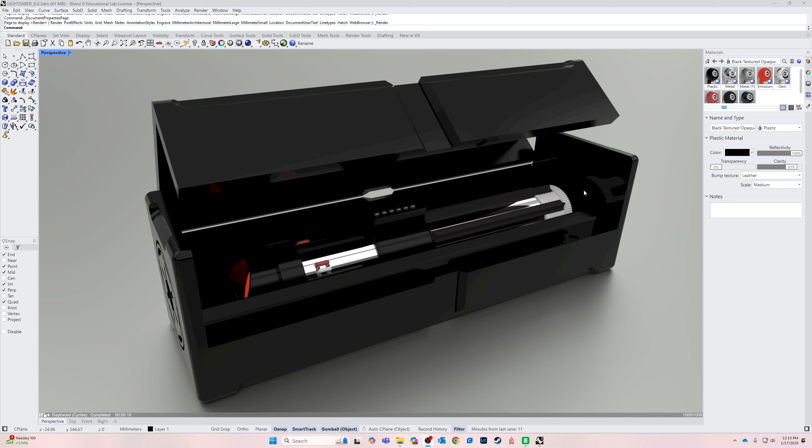To continue with our lightsaber project, the next thing I want to do is create a bit of packaging for it. I'm going to do kind of a premium packaging. I've got it here, and I'm going to attempt to replicate it. I already modeled it, of course. Let me switch into rendered view so I can move around a little bit. This is ray traced. I've got the Imperial logo on the back, and a nice crate-like object with foam inserts. I think it's going to be a really nice idea for a package. I can make it out of wood using the laser cutter, or I could 3D print it. Let's go ahead and get started.

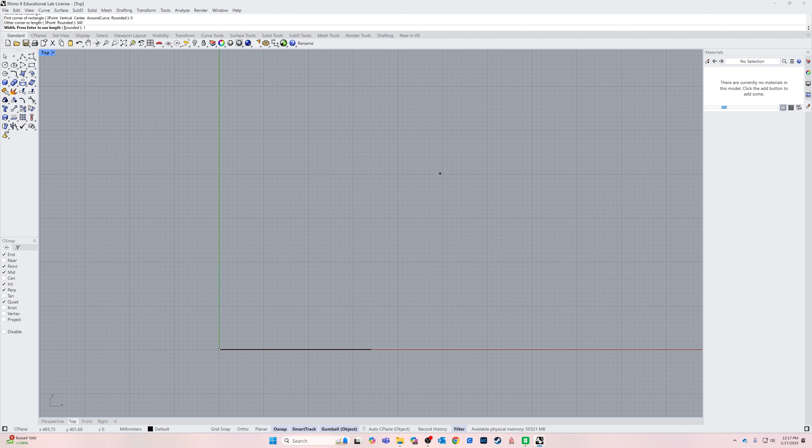I'm going to start with a blank drawing so I can always copy and paste it onto the other project later on. I'll start off in a top view, double click into that window. The overall dimensions of our little crate are 100 millimeters by 340 millimeters. I'll start with a rectangle at 0, enter, then come out 340, enter, 100, enter. So this is the overall dimensions.

I'm going to switch to a perspective view, grab it, and extrude that up 100 millimeters. So this is our box.

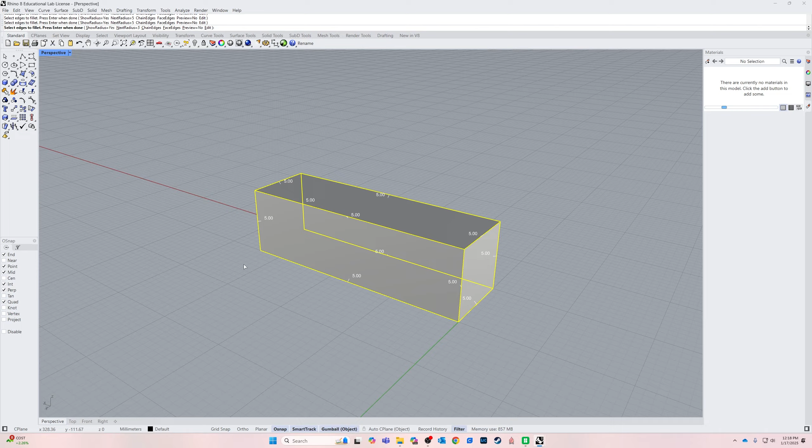Next, I'm going to round off all of the edges using fillet edge. I'll grab all of the edges with a radius of 5: enter, R, enter, 5, enter, then start selecting. If it doesn't say 5 here, escape out and make sure you enter your radius first before selecting any edges. Go through all of these and hit enter twice. Now we've got that shape.

What I want to do next is create these cutout sections. I'm going to go to a front view and draw a circle with a radius of 5. Actually, I'll use my grid snap here, so turn grid snap on. Let me start over with grid snap on, click here, and go straight up.

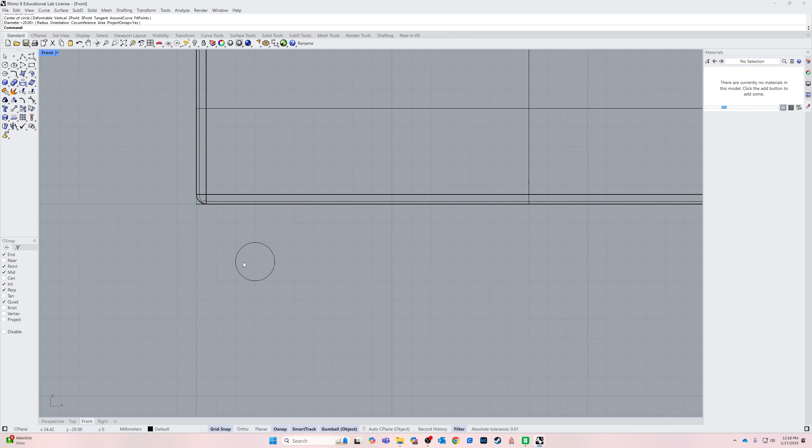I'm going to cut out this little section here, which is 10 millimeters. I'll draw a line from this quadrant to the center, and from that center to the quadrant, making sure snaps are turned on. Then trim, enter, select these objects as my cutting objects, enter, and trim that out, enter. Then I'll delete this and put it into its place here.

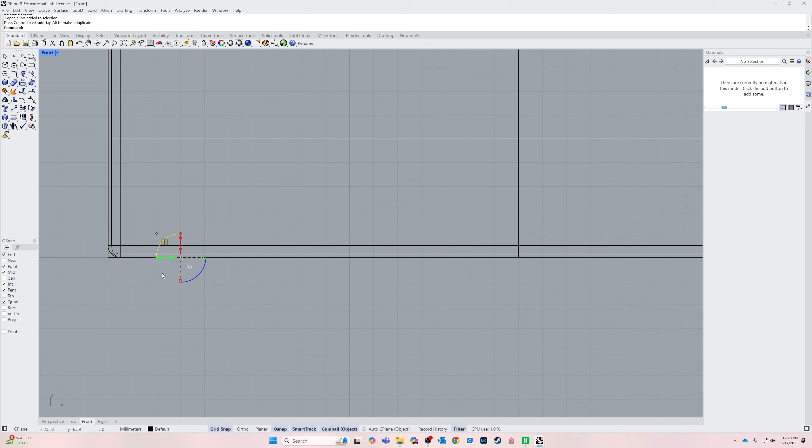Select the object and move it up. Since we have grid snap turned on, and our object is snapped to the grid at the base, we're in a good position to get that right where we want.

Then I'm going to mirror that over from the midpoint here. If you're not in ortho, which I'll turn on, you can just hold down shift to keep it that way. I'll draw a line from right here all the way across, and from right there all the way across. Select this whole object and join it.

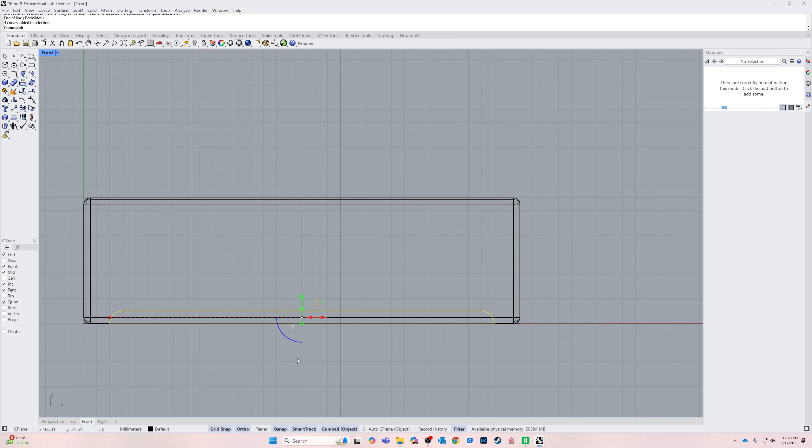I want to put that on the top as well, so I'm going to mirror this object onto the top. Type mirror, enter, select the object, and then select the point you want to use as a mirror pivot. I'll do a little line here from there to there, and we've got our object mirrored to this side. Now I'm going to select both of these pieces.

I'll go to a top view because I want to mirror it onto the back side. Mirror, enter, select the midpoint here, and draw a line this way. Now we should have our objects drawn just so. Very good.

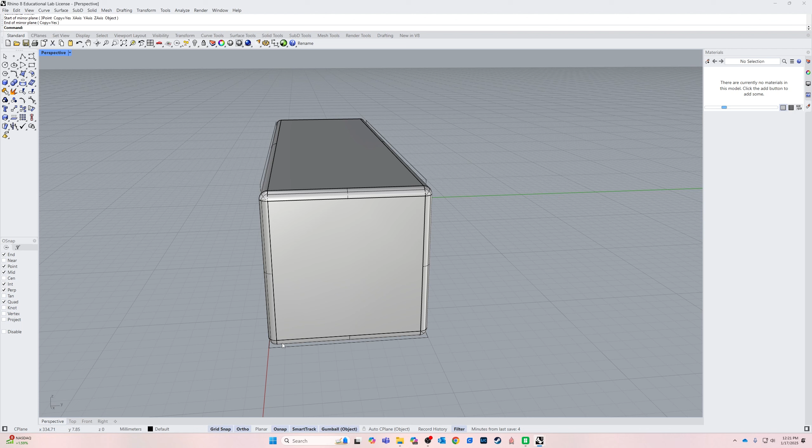I want to put them on this side as well, so I'll switch to a right view and redraw our circle from the center out here to there. Then do the same trim line from here to there, trim, select these as the cutting object, click there, enter, click there to delete that. Then I'm going to move it over one.

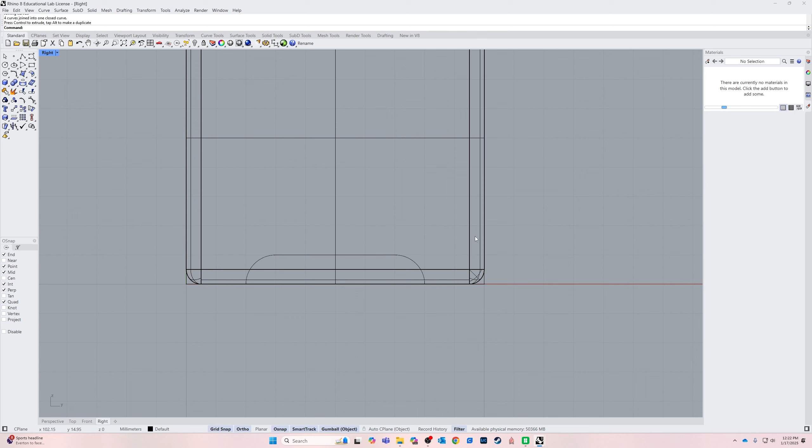And then I'm going to mirror from there over there. A line from there to there and there to there. And then we're just going to select the whole thing, join it together, and move it up into position, again using our grid snaps. So keeping everything snapped works really nicely here. Okay, and then I'm going to mirror it again to the top, from the midpoint here to there. Select both of them, go to the top view, and mirror it to the other side.

So the next thing we want to do is go ahead and clean this up a bit. I'm going to get rid of this line. And then I'm going to go ahead and hide this object just for a second so we can only focus on what we're doing here. So I'm going to go ahead and select this, and then I'm going to click on the extrude.

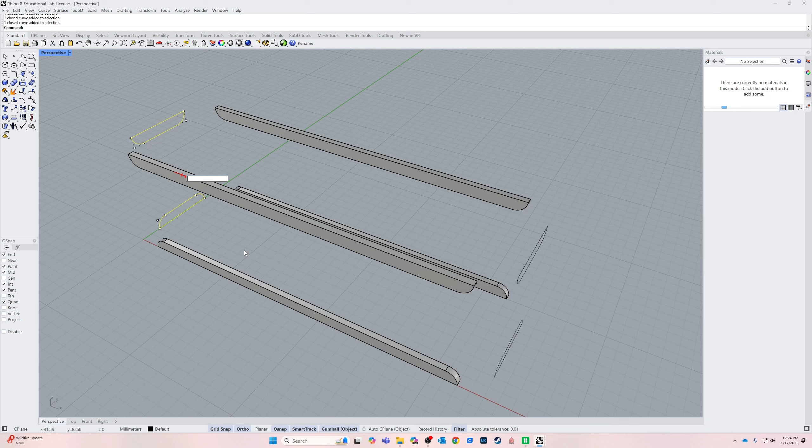You see the arrow direction there, and I'm going to go 5 millimeters. Okay, do this and this, and then I got to go -5 because it's pointed that way. -5. Whoops, wrong way, wrong one. I missed it, I pushed the arrow instead. So click here, -5, extrudes inward. These ones as well. Actually, let's do this one first, right? Yeah, because it's facing that way. We go 5. Dang it.

All right, so now what I want to do is I want to create a chamfered edge on the bottom of these so that I've got a little bit of a 45-degree angle. These are 5 millimeters thick, so I'm going to do a 5 millimeter chamfer so that I can keep everything at a 45. Makes it really easy for 3D printing not to have any straight overhangs. So we'll go chamfer, edge, and I'm going to select this, this, and this on all of them. All the way around.

All right. Enter, enter. Okay, so that now creates that shape that we want for the negative space. Let's go ahead and click on our center mouse wheel here and bring it back.

Okay, and then I'm going to go ahead and Boolean difference. Select the object I want to keep, enter, click, click on all of these. You'll left or right select to grab the whole thing, and then hit enter. And I have my Boolean difference set up to delete the cutters as no, and so it keeps the cutters there. But then I've got to go through and actually just delete them because I do not need them. All right, so there we go.

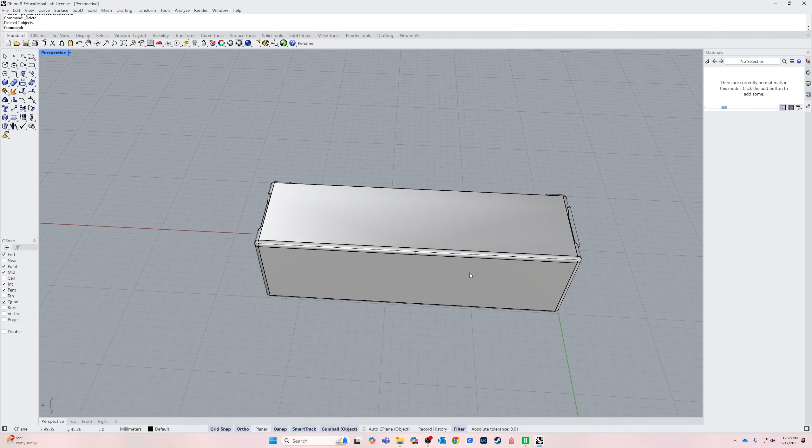That's the first major steps. The next thing I'm going to do is I'm going to create the kind of panels on the top here. So let's go to a top view and find the midpoint. Draw a line from the midpoint here, just straight out.

And then I'm going to do a 10 offset, 10 millimeters on either side. So I'm going to do one this way, and I'm going to do one this way. So again, offset, show it again. Delete, delete, offset. Oops, offset. Click on the object to offset and choose your distance. 10, enter, click. Click over here, enter to bring up the same command. 10, enter, click. Okay, very good.

So now we've got this shape here, which I'm going to draw a rectangle from there to there. Very good. And get rid of my guidelines. All right, so this rectangle here, I can go to perspective. Mine is up on the top here.

All right, so the next thing I want to do is I'm going to grab this and I'm going to go ahead and just extrude it up. And then I'm going to mirror it from a front view to the bottom. Okay.

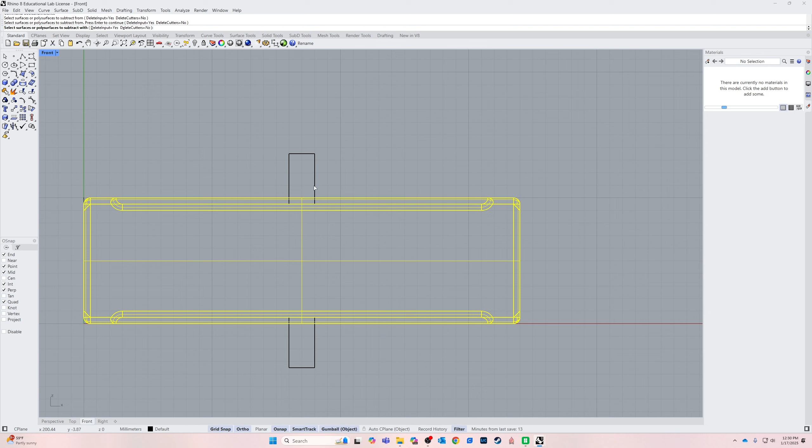Then I'm going to Boolean difference this object I'm keeping, enter. Then click on the objects you'd like to get rid of, enter. And then I've got these faces now like that. Switch to perspective. Cool, now I just have to do the front face.

So switch to a front view again, draw a line. I'm going to go from right here to right here, from there to there. All right, draw a rectangle because that's what I'm going to use. Then click here, and I'm going to select this curve, shift, select that curve, and delete. So I'm just using this rectangle as my guide. Switch to perspective, and then I can mirror it to the other side.

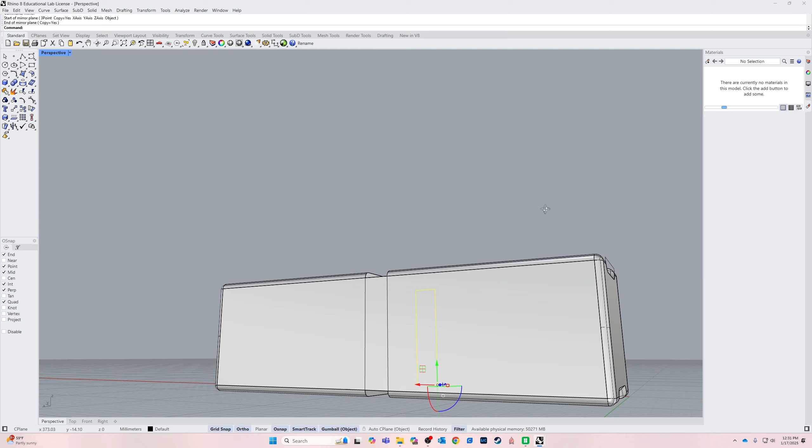From the midpoint, draw a straight line, click, and you should have them on both sides. Then I'm going to go ahead and extrude this, -5, enter. Extrude this, oops, just 5, enter. Whoops, I moved it instead of extruded it. Keep doing that. Curve, extrude, 5.

Okay, then Boolean difference, select this to keep, and get rid of these two. Then delete our cutters to see what we have left.

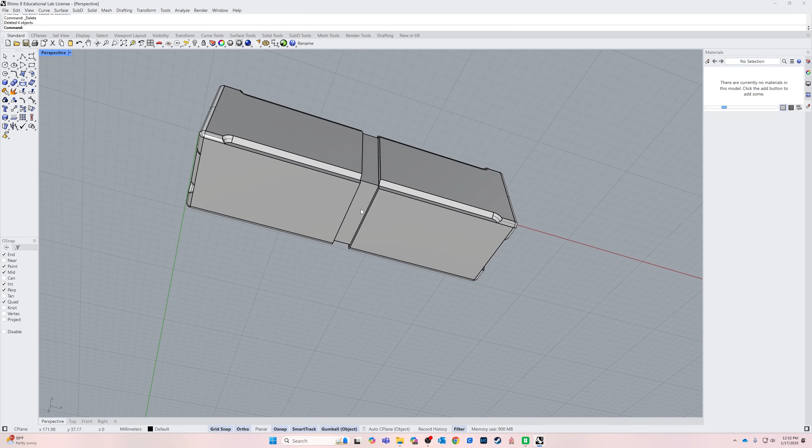All right, and actually I didn't mean to cut this bottom part off. I want to leave that there, so let me go ahead and fix that. I'm going to push-pull this section.

It looks fine, but now I get to show you the push-pull tool. So push-pull, there we go.

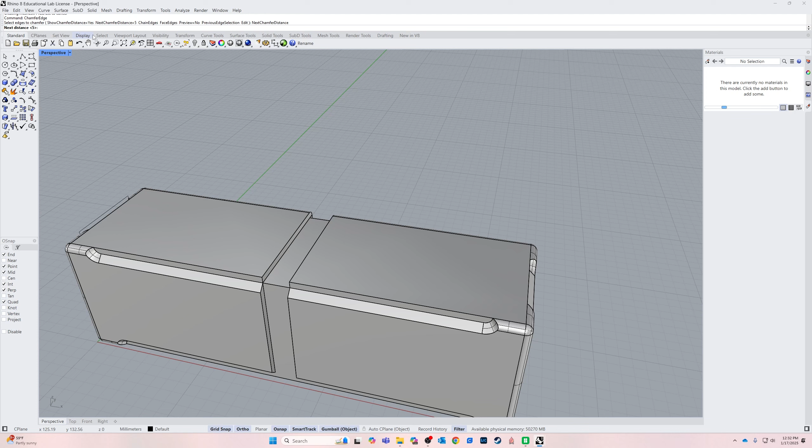Then I'm going to bevel the edges of these with a chamfer. So chamfer, edge, and this time the distance I'm going to do is 4, enter. Then I'm going to click on here, here, here, here, there, and there. Enter, enter.

Okay, so it worked on these two. For some reason it didn't want to work on these ones, which is fine because I can easily fix that. So I can just go push-pull, and grab right here and just drag it out. Push-pull, drag it out. Okay.

All right, so that's the overall shape of our object. The next step is to create the separation and the hinge mechanism for it.

All right, so I'm going to do some math calculations. The wall thickness around this is going to be 10 millimeters. So what I'm going to do is draw basically a box right here, the right size. Let's go ahead and draw a box, 10 on either side.

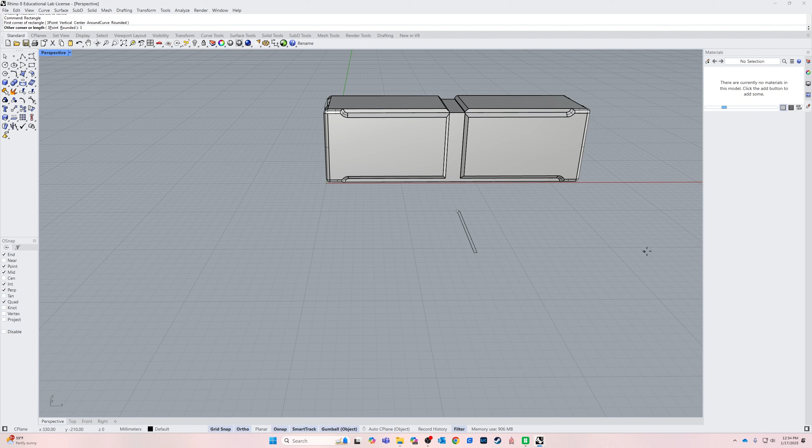So rectangle, we're going to do our overall is 340, so 320, enter. And then I really don't care about this length because I'm going to make it overlap. Then I'm going to go ahead and extrude it up.

Okay, and then I want to do 10 millimeters from there, so I'm going to go to a top view here. Because this box, all of our objects here—sorry, I had my gumball set to object instead of C-plane, so align to object was selected. If I just right click on the gumball, I'm aligning it to the C-plane now, so it works a little bit better.

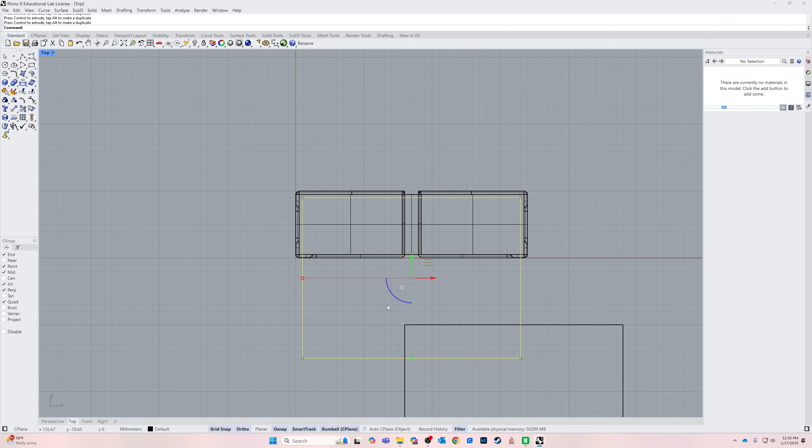Okay, so I got 10 on either side here, and 10 there. So that's basically where I want to cut out this section, right?

But I'm going to switch to a front view as well—I'm sorry, a right view. Oh, of course, I put the wrong one in the wrong spot. So I want to go all the way to there.

And then this is going to be 60 millimeters from the top. So we got 10, 20, 30, 40, 50, 60. So that's where that goes.

Okay, and then in the back, I've got like 35 millimeters from the top down. So I'm going to draw a line. Line, enter.

And then I'm going to draw a line because 35 isn't right on the snap there. I'm going to go 35, enter, click, and then draw a line from the endpoint out, then a line on up, and a line on over.

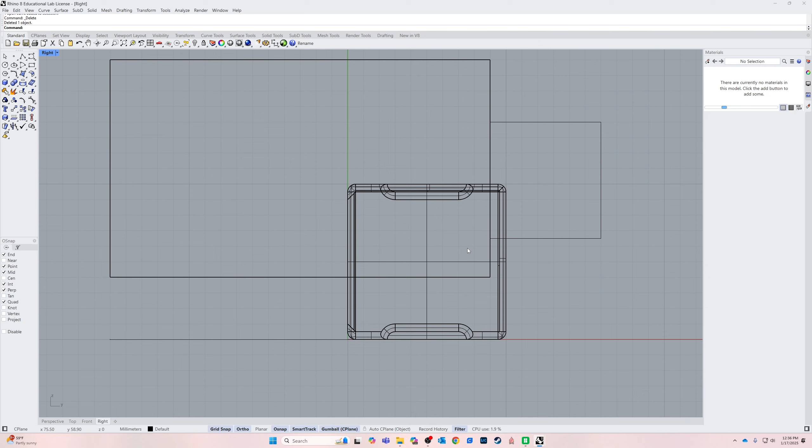And then I'm going to select this whole thing. Actually, draw a rectangle because I'm going to extrude this. Okay, so I'm going to get rid of these curves. Left to right select to grab just the objects I'm surrounding. And then I keep this here.

Okay, switch back to perspective with both of those selected. All right. Okay, and I'm going to go ahead and extrude this 320 millimeters.

All right, even though they're not aligned yet, I can fix that really quick. I'm going to move, enter, grab this point here, and go right there. Okay.

Then I'm going to go ahead and just Boolean union these two together. Actually, you know what? No, I'm going to go ahead and extrude this up a little bit more. Boolean union together. Okay, so this is like a funky looking shape, but it's literally to be able to split my object well.

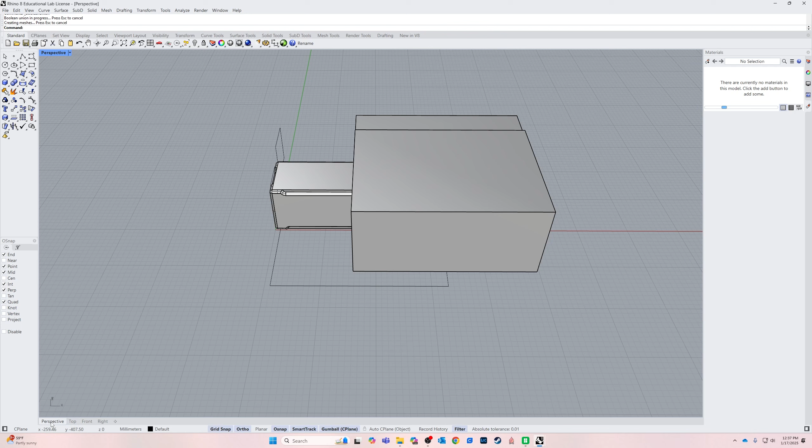So let's go ahead and use top view here, and I'm going to come over here and line it up again, 10 millimeters in. And if I look at it in perspective here, now you can see I've got the back of the latch split here and the front split a little bit lower to match my design.

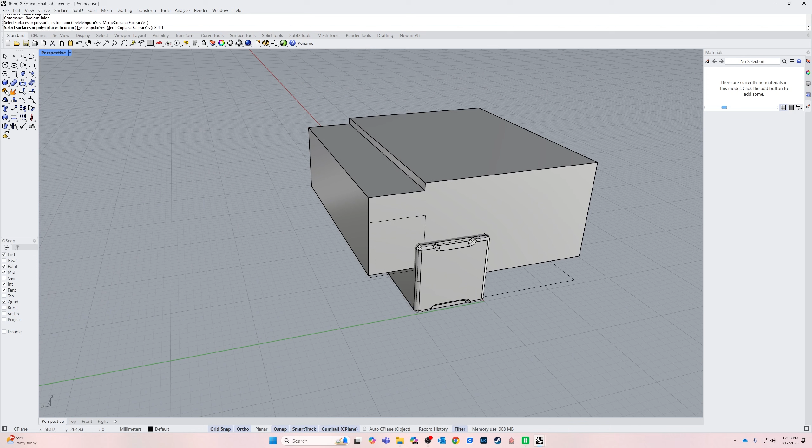So next, what I'm going to do is go split. Oops, split, enter. Click on the object to split, enter. Click on the object I'm going to split with, enter.

All right, so let me show you this real quick. I'm going to cut this out here. If I look at this now, you can see I don't have any interior shape on this, which is a problem, right?

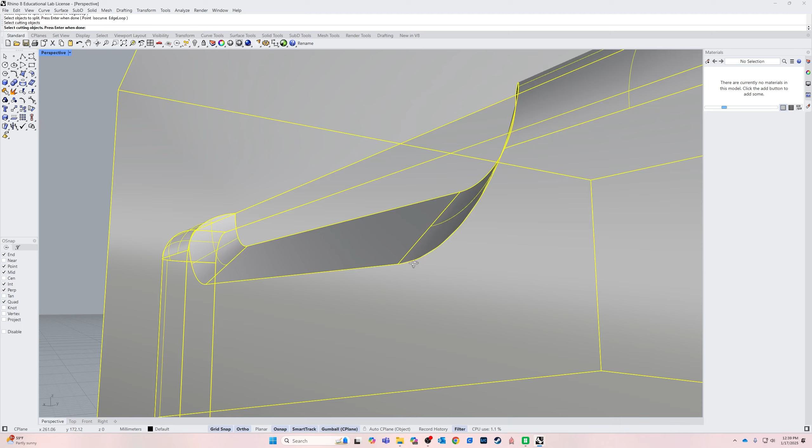So let me undo real quick, Control Z. What I'm going to do now is split this with this and our internal shape. Let's go to a ghosted view so I can see through it, and that. So I'm splitting it with both of them. Enter. So now I should have this shape. You see how it's carved around it?

Okay, so I'm now going to delete that. So what that does is it gives me an interior shape. So let me hide this, and you can see what I'm talking about here. So let me go back to a rendered view here. See, now it's a solid object, right? Because I used the interior of that box to give it a fill on the inside there.

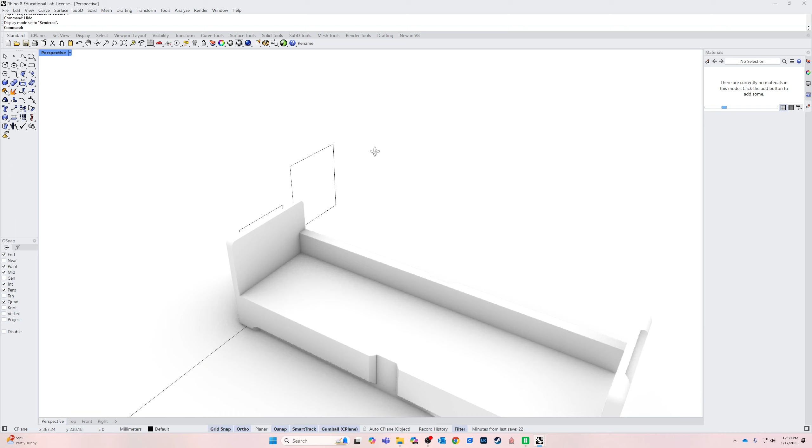So now what I need to do is duplicate this. I'm going to copy it to the clipboard, Control X to cut it, Control V to paste it. And then I'm going to go ahead and join these two objects together with join. Join works with surface to surfaces, and Boolean works with like a sphere overlapping a sphere, so solid to solid. Okay, so that's our interior shape there.

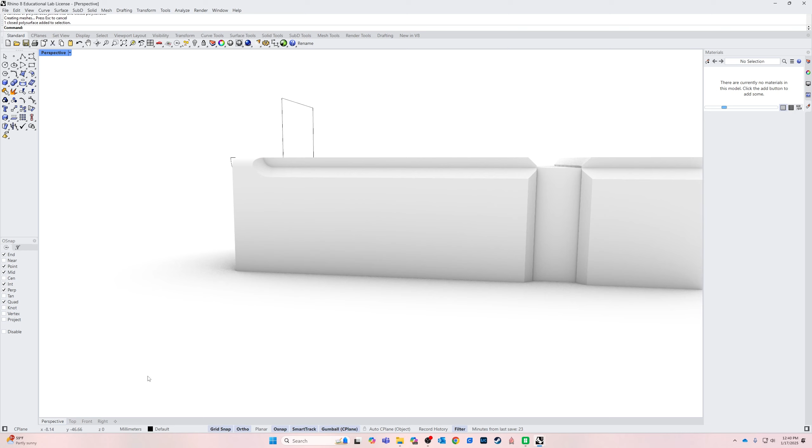And then this one here, let me go ahead and hide this so you can see it's open. Control V, because I copied that to the clipboard. Now I can join these two shapes together. Okay, so that's all one piece. Cool. But it doesn't have an opening. So that's the next step.

All right, so go ahead and bring everything back. I'm going to go ahead and switch over here to shaded. Go up to edit, select objects and curves. Edit, select objects, curves, delete. All right. So now we're ready to create the hollow section in the middle.

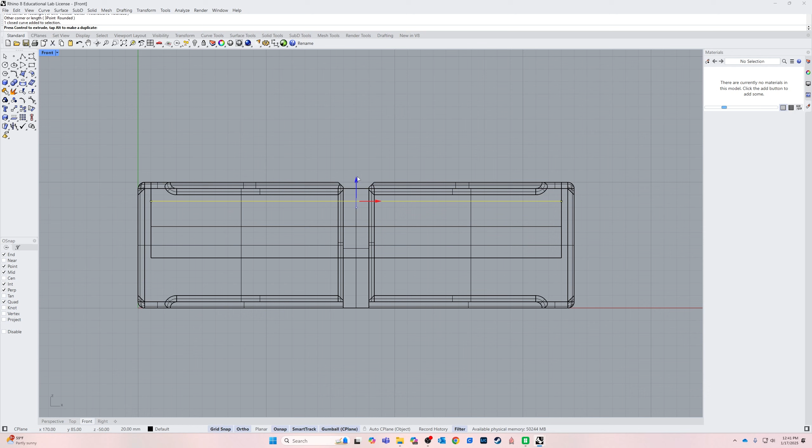So first I'm going to go into the top view here and draw a rectangle, and that rectangle is going to go from this point to this point. Select it so I can see it when I switch views. I'm going to go to a front view here. All right, and then I'm going to pull this up on the snaps. Oops, it's not snapped. So it's not on the grid snap.

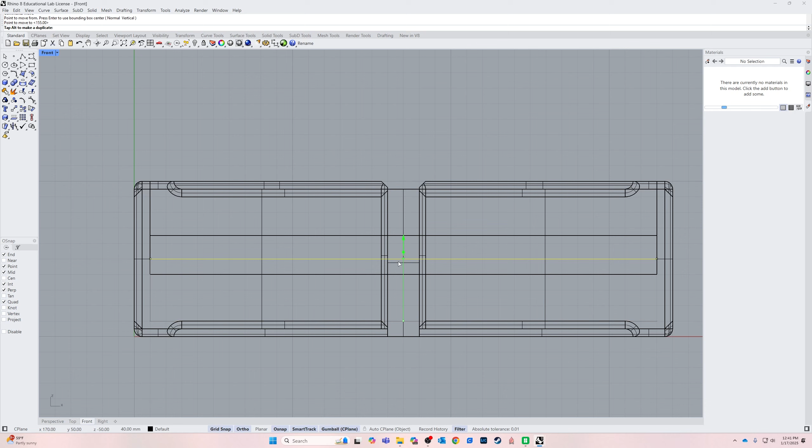So here's what I'm going to do. I'm going to turn off my grid snap, type move, enter, select the object to move, and while it's selected, turn the grid snap back on. Okay, because I want to snap it here, and then I'm going to extrude it to there. Okay, so if I look at it in perspective, we have it. Just a box inside of there, okay?

Just to show you what I'm going to do, I'm going to hide this. Okay, so now we're ready to go ahead and Boolean difference this out. So we go Boolean difference, select the object to subtract from, enter, and then select our object to cut out with, enter. All right, and you can see we've got our cut perfect.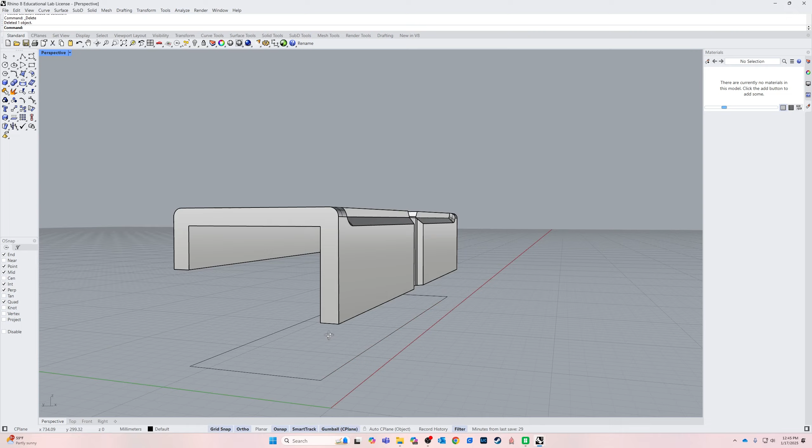Okay, so next we do the top part. So let me hide this. And then we go hide this. All right, Boolean difference. Select this, enter, select that, enter, and now we've got that all cut out. Cool. Bring everything back. So now this will open up, and that's where our lightsaber will go inside. So cool, perfect.

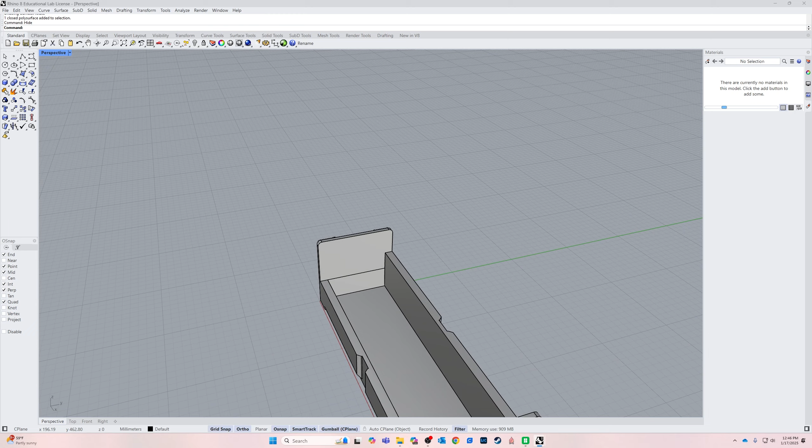The next thing we want to do is I need a little front lip. So let me hide this real quick. I want a little lip in the front for the top to kind of go over, because I want the lightsaber to be a little bit higher than this. So what I'm going to do is draw a rectangle from here to there and do 6 millimeters. Oops, I don't know why it drew that way. Not a big deal though. I go move, enter, select this corner and put it right there.

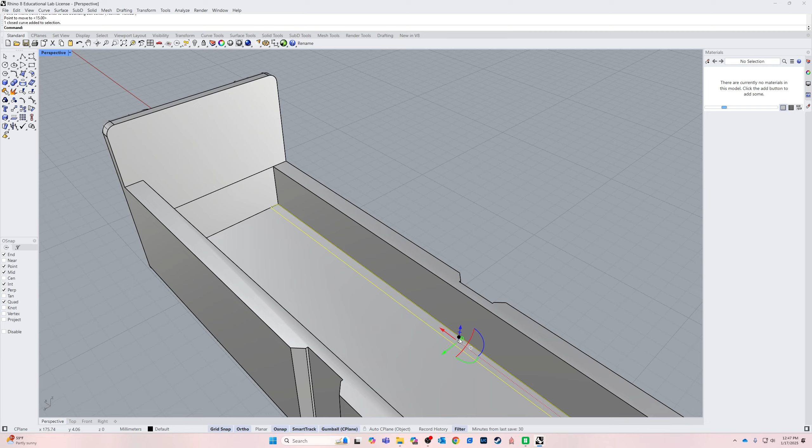Cool. And that lip height is going to go up above—it's going to be right at the midpoint there. So 50 millimeters. So going to bump that up. And then of course this is sitting on top of a 10 millimeter thick wall. So I'm going to go up 40. So now I've got a nice little lip there.

And then I want to chamfer that edge to make it so that when it falls down, it'll kind of have a little lip to be able to get over the top of. So I'm going to chamfer the edge with the distance of 5 and click here, enter twice. Actually, you know what? 4 was better. Distance of 4. Chamfer edge, distance of 4. Click, it says 4, enter twice. All right, cool.

So now I'm going to Boolean union these things together, all as one piece. Then I got that line there, and it just bugs me, so I'm going to merge all coplanar faces, because those faces are coplanar, and it'll make it like that. So we're almost done.

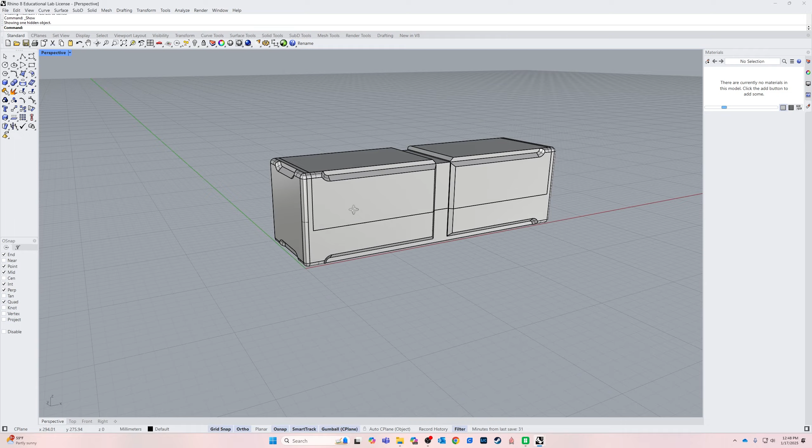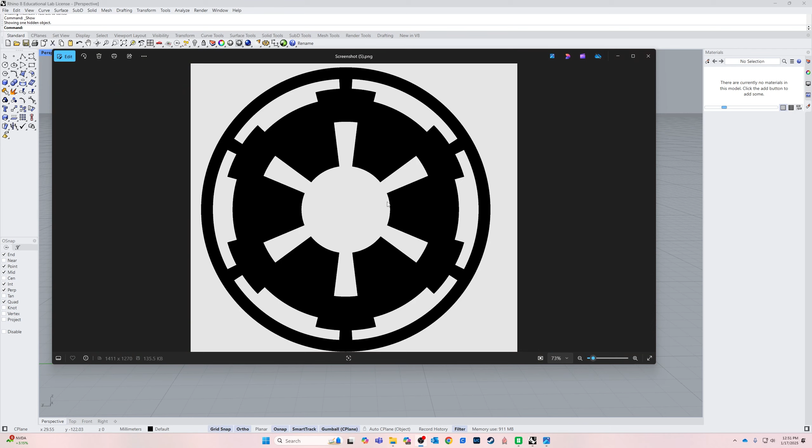The next thing I want to do is put that little Imperial logo on the ends here. I'll show you how to do that really quick because it's kind of fun. I've got it in my downloads folder, let me find it real quick. I pulled this off the internet, and basically what I'm going to do is live trace this in Adobe Illustrator. So let's do that real quick.

First thing I'm going to do is go to document setup and change my artboard - edit artboard, going from custom here to fit artwork bounds. Then I'm going to select all, and go to object, image trace, make and expand. Okay, then I'm going to click on this and click here to turn it black, and then take this and turn it to nothing.

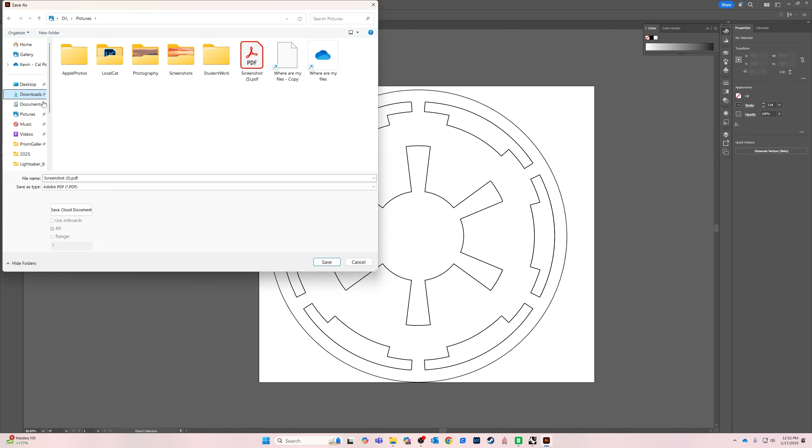Then I'm going to grab my direct selection tool and delete the exterior lines around it. Then all I've got to do is file, save as, and save it as a PDF. I'm going to put it in my downloads folder and save PDF.

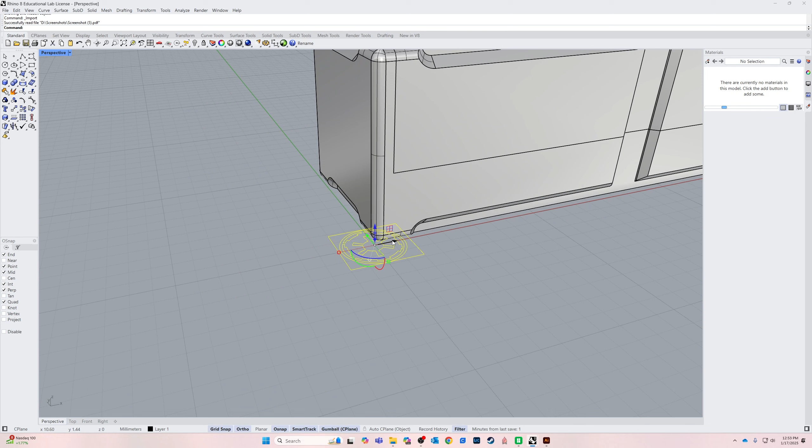Minimize and go to Rhino, file, import, and I'll bring in my screenshot. Just hit OK here - you can always scale it out later. Then I'm going to move it over here and get rid of the artboard bounds here.

Then what I want to do is offset this because I need an extra ring around it. So I'll go offset, enter, and then the distance I want to offset, I'll hit D, enter. Then I'm going to click from here to there, so it's just the same thickness as that, and then offset to there. Select the whole thing, rotate around, pop it up straight.

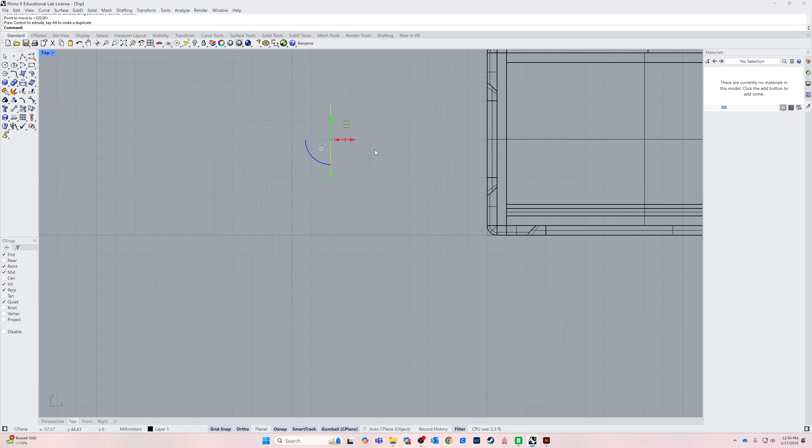From a top view, I'm going to come over here, and again turn off my grid snap, go move, enter, select the object, turn back on grid snap, snap it to my grid. The reason for that is our object has a flat surface right along that grid here. Then I'm going to move it to our midpoint, so the arrow is lined up with the midpoint there. Pop it over there, go to perspective here.

Then switch to a right view and bring it up to the midpoint. It's not quite at the right orientation, so I'm going to rotate it - I'll turn it around one time because I need it to be like that. And it's not quite perfectly centered here.

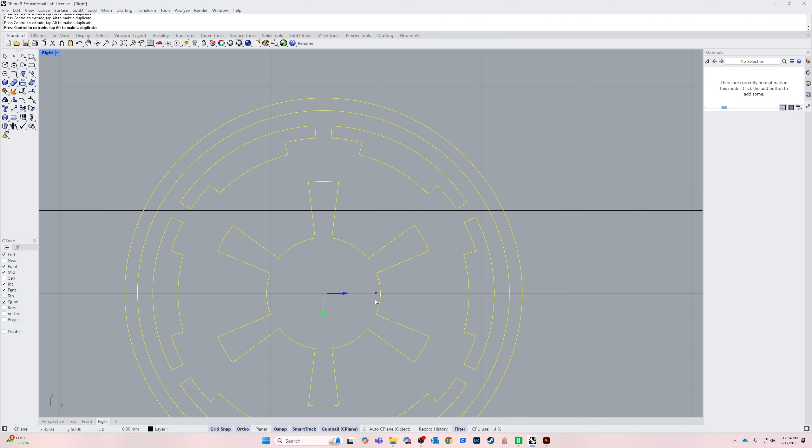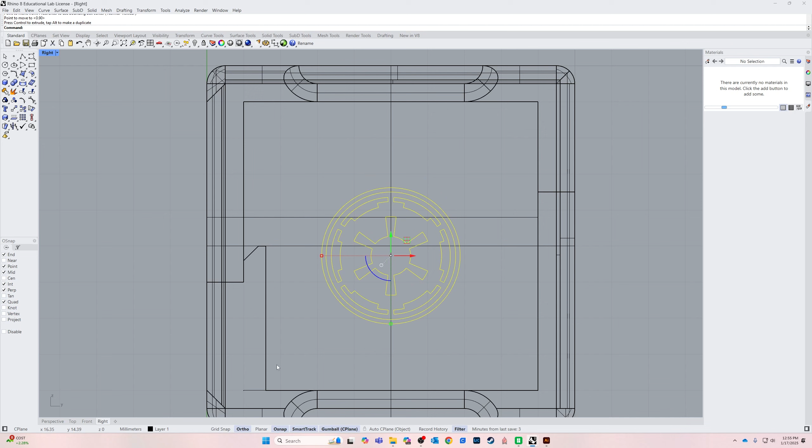So turn off the grid snap, grab it to start moving it, turn back on grid snap - sorry, hold on a second. Go move, enter, select midpoint here, then turn off grid snap, then turn back on grid snap. Okay, then I've got to move it up. Dang it, off grid snap. Move, grab from the center - won't give me a center. Maybe I'll... right, make sure your center snap is on. Why won't it let me pick my center?

I'm just going to line it up with the arrows, close enough, and zoom way in if I need to, and just kind of, with all my snaps turned off, move it to there. Then hold down shift and scale it to the right scale dimension you want. Maybe about there. Switch back to perspective.

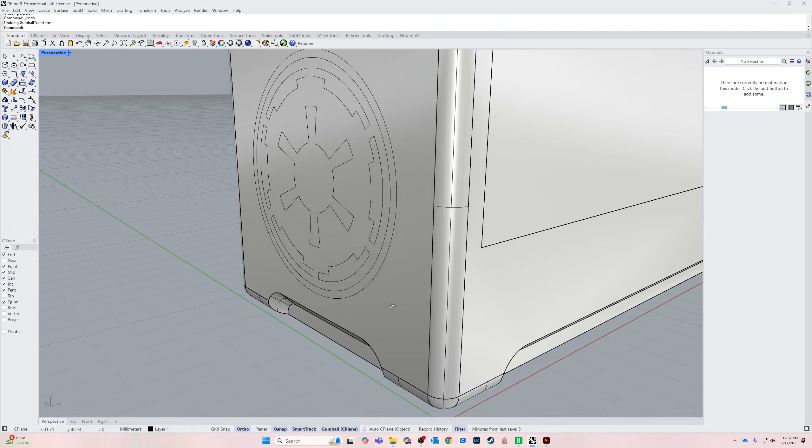Then what we're going to do is mirror this onto the other side. So go mirror, select this point on the midpoint right there, and then drag out with ortho on. And there we go.

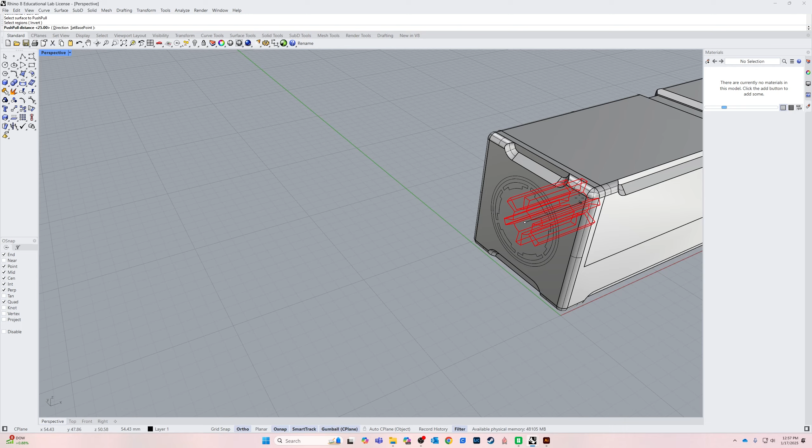Then what I'm going to do is just go ahead and push pull each one of these segments. So push pull that, enter, 4, enter - actually no, I'm going to do 3. 3, enter - whoops, wrong way. Enter, back this way, 3, enter. Okay, and then if I just click on this, enter, enter - yes, make sure you're dragging the right way. Enter. Enter, click, enter, because it just uses that same dimension if you don't put in a new one.

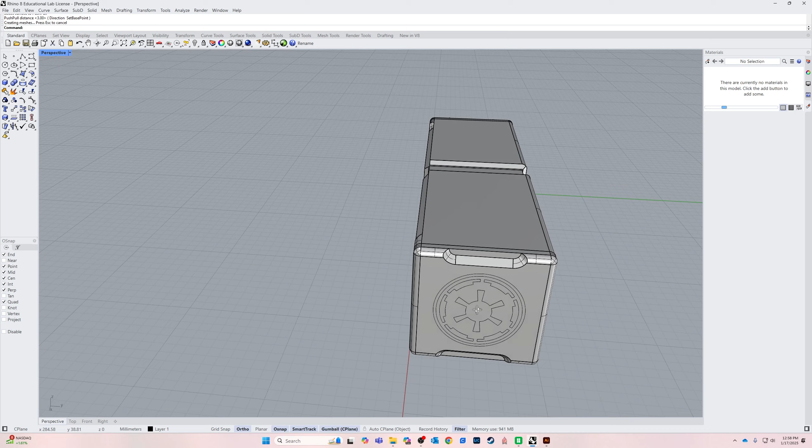Okay, and repeat over here. Push, pull, click, drag.

So push, pull, click on it, enter, start to drag, 3, enter. Dang it, keep doing that. 3, enter. You got to get your clicks in the right spot. Once it's selected and you drag, you don't click again.

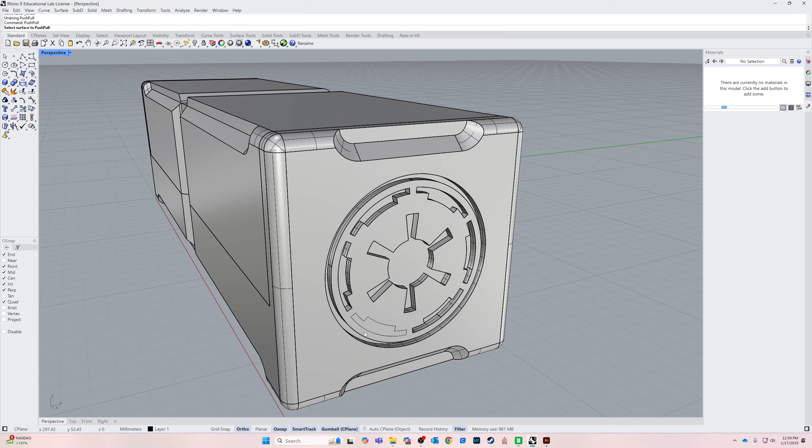As soon as it starts, you see that red? I just hit enter. Oops, I went the wrong way. All right.

Cool, so this is a good looking design, but the problem is evident when you put it into rendered here. You see there is no clearance for this top to close and open.

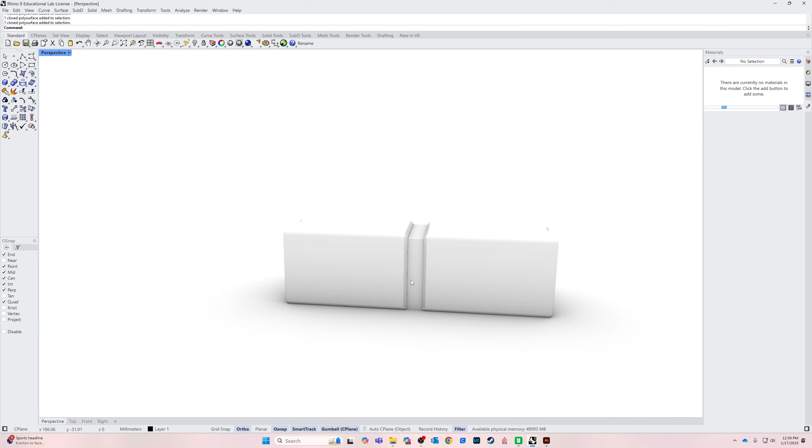So what we need to do is push the top around a little bit more. Oh, and I'm missing, I got a couple of spots here I need to push pull too. Right here, just pop that all the way down. He's probably missing on the other side too. Oh, that side worked. Okay.

All right, cool, so now we just have to create clearance. And then I also want to create some recesses to be able to put magnets in it so that it latches with magnets. So I'm going to go ahead and isolate the top here and make some modifications.

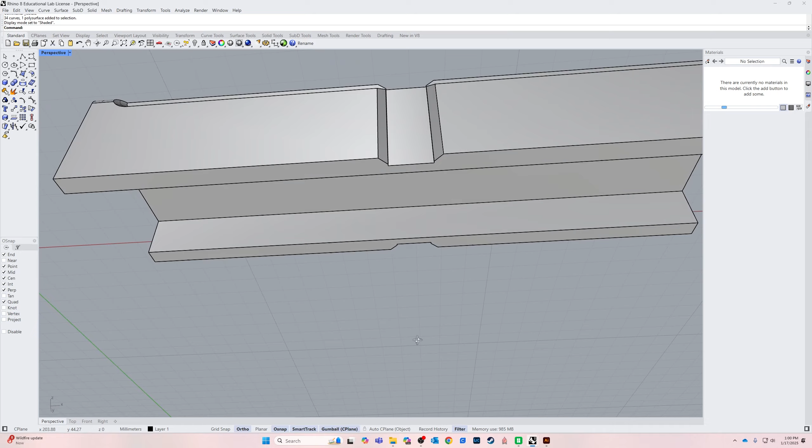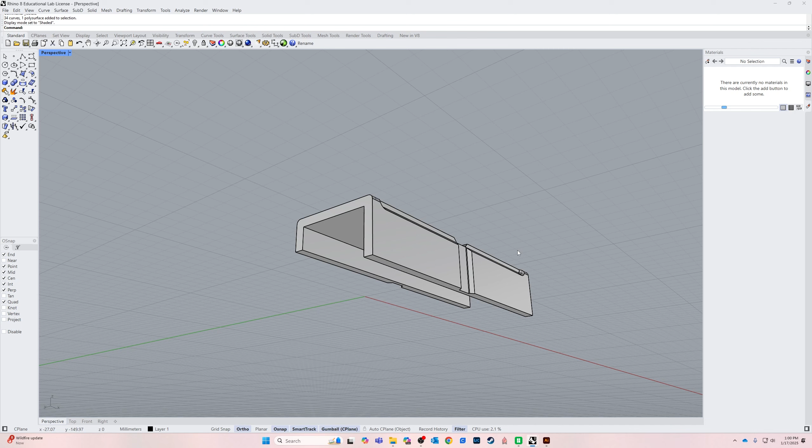Everything is perfectly to scale, and that's kind of important at this moment where I'm going to start manipulating the shape, because if I put a magnet in, I've got a 6 millimeter diameter magnet with a 1 millimeter thickness. If I change that scale when I'm going to 3D print, that magnet won't fit into the slot that I create. Also, I'm going to create a 1 millimeter clearance around the whole thing so that it opens and closes nicely. If that scale changes, you might get less than a millimeter, and as it gets smaller and smaller, that clearance is going to be a little bit less than what is necessary to really create the clearance you want.

So let's go ahead, I'm going to Control Shift and click on this face, then click the red arrow and go -1 to move it back 1 millimeter. I'm going to click on this face again, Control Shift or Command Shift if you have a Mac, click, and then go this direction 1 millimeter. Then I'm going to come underneath the bottom here, Control Shift click, and go up 1 millimeter, and then over here, Control Shift click, I'm going to go up 1 millimeter.

Let's look at it when I bring this back, and now if I look at it in rendered, you'll be able to see that we have a little bit of clearance all the way around. I'm going to put hinges in the back, and those hinges will work with 1 millimeter as well. And then I'm going to left to right select to get rid of my curves.

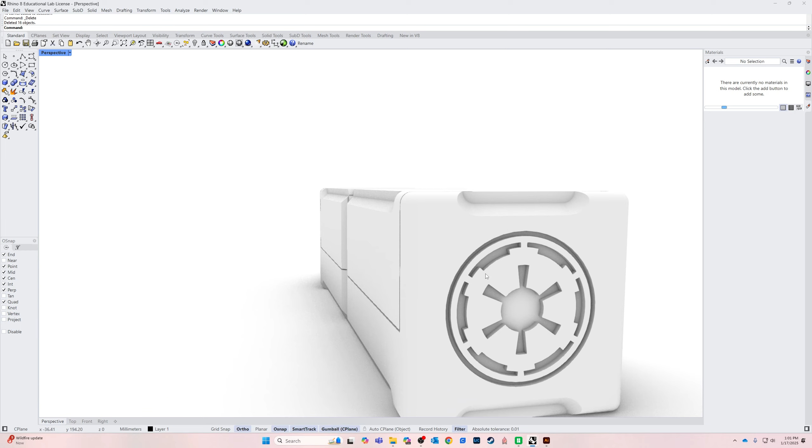All right, so the last thing I want to do with this is I want to create a bit of a recess for some magnets. So I'm going to hide this.

And then I'm going to go ahead and set my auto C plane here and go back into shaded so it's a little easier to see with my grid. With auto C plane on, if I Control Shift click on this surface, it now moves my construction plane to the top there. So now I'm going to draw a circle.

And I'm going to just draw the circle. Actually, you know what, let me draw a line first. Line, enter. So I'm going to go ahead and turn center off here. Mid is fine, point off. I'm going to go near because I just want it to be able to pick up anywhere. So near from there to perpendicular.

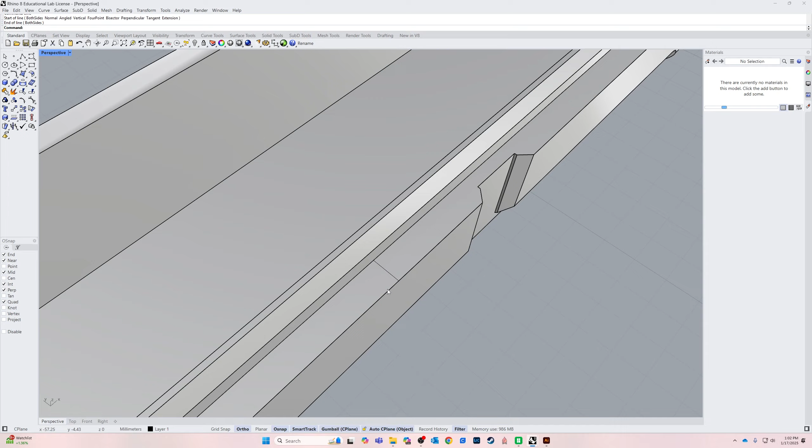And then I'm going to draw a circle from the midpoint here, the diameter of 6 millimeters. Enter. Now that is exactly the size of the magnet, which will be a little too tight. So what I'm going to do is just shift and scale it ever so slightly bigger, maybe about right there. Okay.

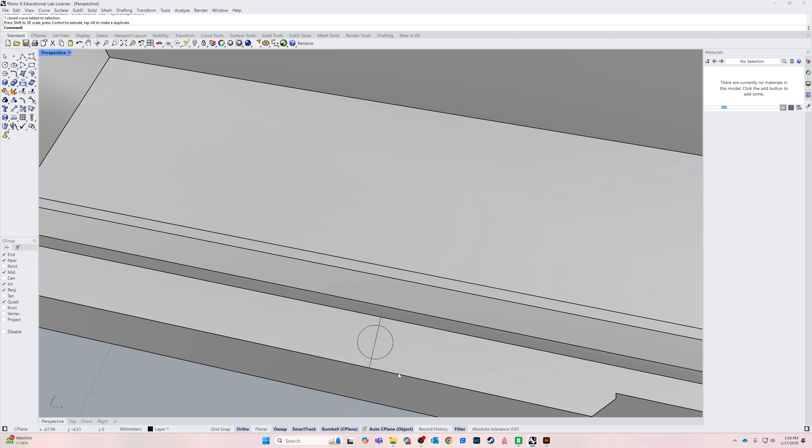Then what I want to do is extrude this -1 millimeter. Okay, so now I've got an extrusion right there. That is the depth that I want. But I want to be able to line this up with the top as well.

So I'm going to grab this extrusion. I'm actually going to isolate it just to make it easier for you all to see. I'm going to grab the top here, Command-Shift-Click, and move this up. There's a gap of 1 millimeter, and then there's a 1 millimeter depth I need, so I'm going to go up, you guessed it, 2. So I'm going to extrude this up 2 millimeters.

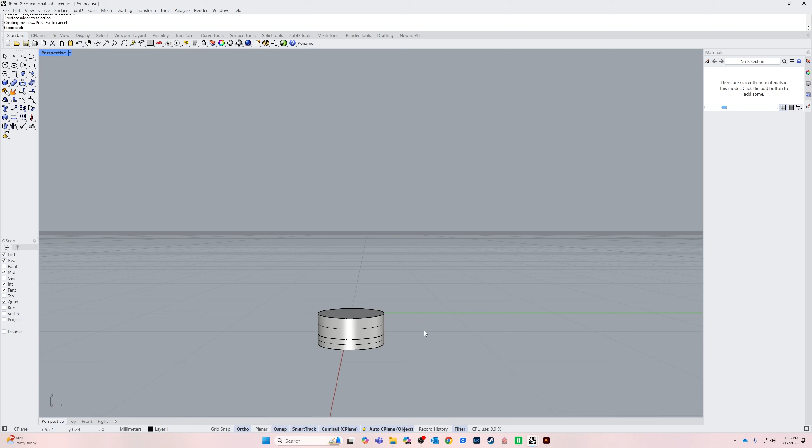Okay, so that is now the size of the magnet that I'm going to Boolean difference out of both the top and the bottom, so I can bring everything back. I can go to a top view, and then I'm going to go ahead and select that and hit Alt, move it over to there. And then I'm going to select both of these and mirror to the other side, so click there to there.

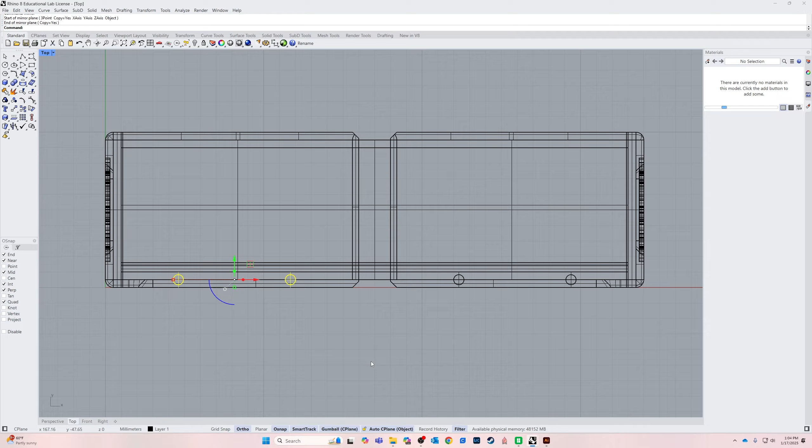So now we've got our magnets lined up where we're going to put them. Let's go ahead and Boolean difference: delete the cutting object, select no, select the object you want to keep, enter, cut out these 4, enter. Then I'll hide the bottom. Bring back this, hide this, Boolean difference, keep that, enter, select these 4, and delete them. Now I've got the recesses at the top and bottom, and they line up perfectly.

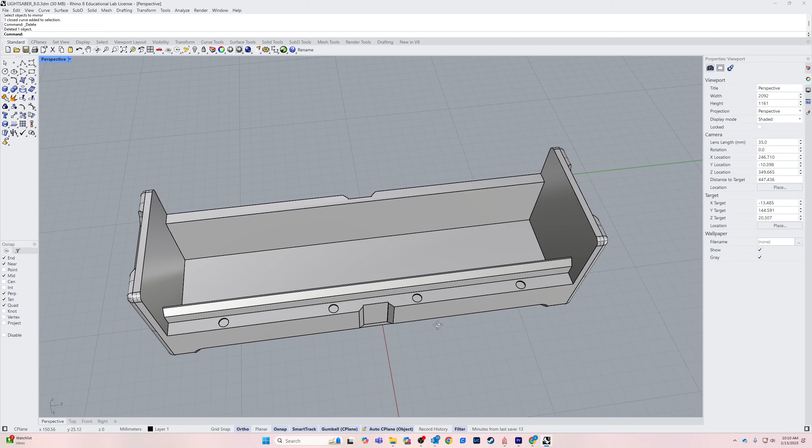Now that we have our little spots for all of our magnets, we want to create little offsets for our hinges. I'm going to have jewelry box hinges in the back, and I'm going to have them hinge on the inside here so you don't see them sticking out on the exterior. I think it's a cleaner installation. It does take a little more advanced thought, but let's go ahead and do that.

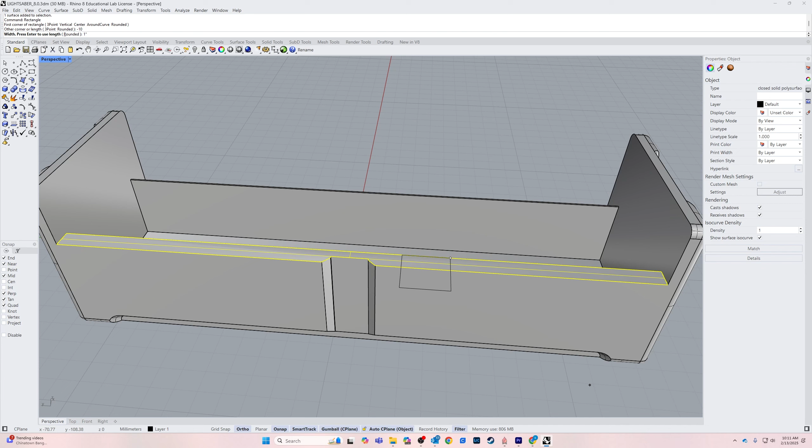I'm going to create a rectangle right on the surface. Make sure Auto C-Plane is turned on. Control-Shift-Click on that surface to set our grid. Then we'll draw a rectangle from here, start to drag out, and go 10 millimeters. But that's going the wrong direction, so I want to delete, -10. That's going the right direction. Enter, and then we're locked in. Now we'll go 1 inch, enter. That gives us a 10 millimeter by 1 inch rectangle, which is the size of our hinge.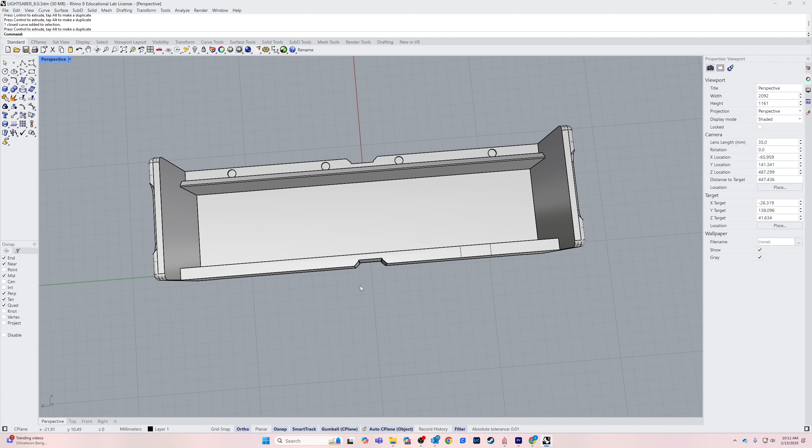I'm going to move this into position, and then mirror it to the other side. Mirror, enter, go for the midpoint, drag this direction.

Now with this, I want to extrude it the thickness of the metal on one part of the hinge, then the gap, which is 1 millimeter, then the thickness of one part of the hinge on the lid. So that's 3 millimeters total, so I'm going to extrude that up 3. Then I'm going to move it down into it, minus 1 millimeter, so it recesses. Then I want to increase the scale of these just along the red axis so it overlaps slightly. Bring back my lid and Boolean difference, keep this and this, enter, get rid of this and this, enter. And now that's created our little hinge.

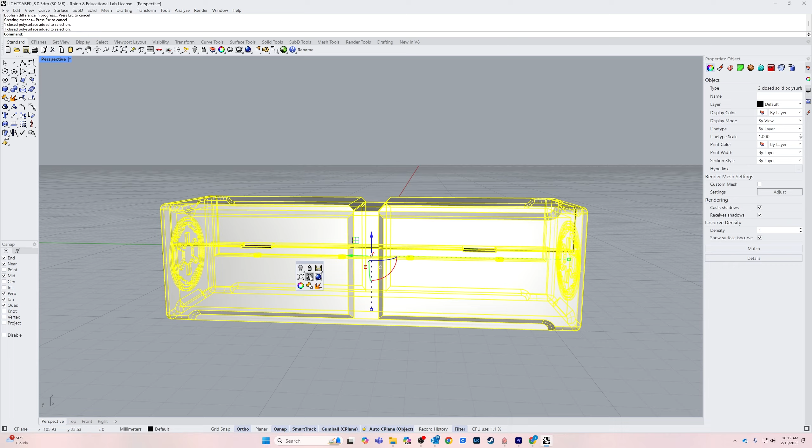The next step is this is ready to fabricate, but I'm going to create a copy of this again. Alt, move this one way over there, because I'm going to stage this one and have it open. So I'll go to a front view and rotate. Click right here as my joint for the rotation, click out, and then go 45 degrees to make it a 45-degree angle, so that way it looks like it's open.

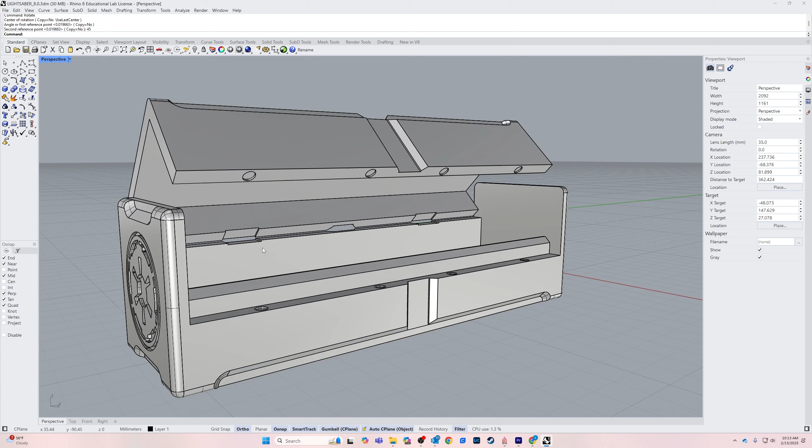Now you can model the hinges, and really you probably should, but I'm not going to do that. So the next step is to bring everything back, and I want to create like a foam insert inside of here for the lightsaber.

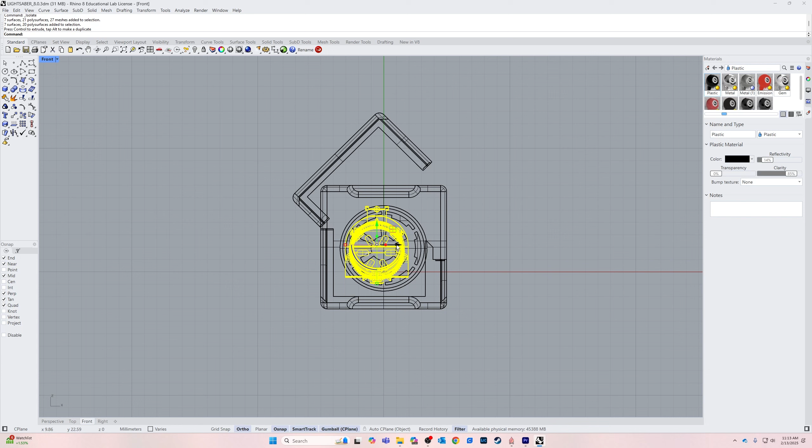Let's go ahead and get started on the foam insert. First we bring over our lightsaber. I'm going to bring over this one here and place it from a top view right into our box. Isolate this whole area so I don't have anything else showing up. Go to a front view and left-to-right select to grab just this object and lift it into position. We just want to get it nice and lined up with where we're going to be placing it, once we have the foam insert, and then I'll move it back a little bit in space.

I did adjust the angle of this so it laid flat and looked better for rendering, but now that's a problem here. So I'm going to rotate it until I can get it flat. If I have ortho on, I'm holding down shift to bypass ortho, and then I'm just trying to line it up with the grid. I might move this even closer to the grid just to see how it looks. Okay, cool, so it looks pretty straight there - straight enough, no one's ever going to notice if it's a little off. So there we go, now I've got it lined up where I want it.

And we're ready to start building the foam insert. So first thing I'm going to do is isolate this.

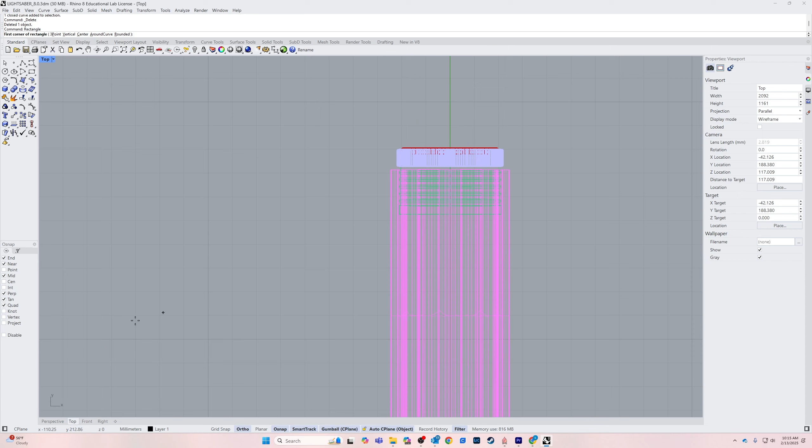Let's go to a top view. I'm just going to trace this out. I want the foam insert to not be super complicated, but kind of contour to the object. So I'm just going to draw a rectangle a few times. I'm going to turn off all my object snaps so that it's just going right onto our grid.

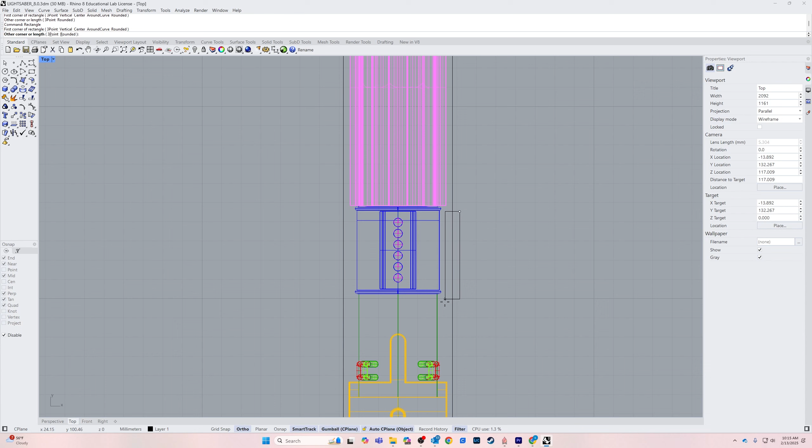I'm going to go from right around here all the way down to there. And then I'm going to draw another rectangle, and I'm just going to kind of do this so that I can create little notches around some of the bigger features here. And maybe one more just right here for a little detail.

Okay, then what I want to do is take these and mirror them to the other side. I'm going to go ahead and turn my snaps back on, get my mid here, and drag it up.

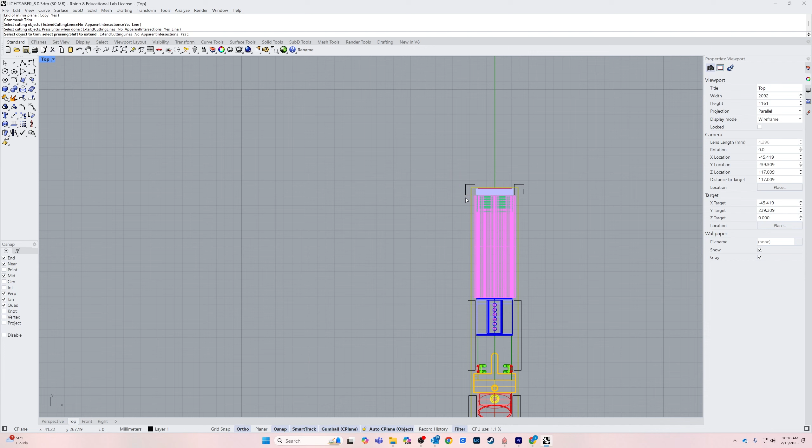Okay, and then what I've got to do is trim. So I'm going to set this as our cutting line first, enter, and then trim out this overlap on the outside here. And then hit enter, enter, and I'll use enter to bring up the same command again. I'm going to use these as my next group of cutting lines, so I'm just contouring the foam to our object. Enter, and then trim these out.

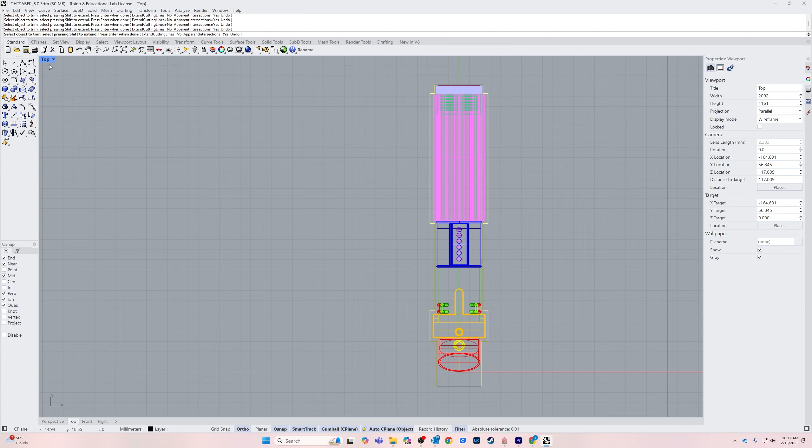Okay. Enter, get out of the command. Back to perspective here.

Since it's all isolated, I can go ahead and go File, Edit, Select Objects, Curves, and join them together. Turn off my auto C-plane - I just noticed it's still on. Z, enter, S, enter to zoom in on our object that we have selected here. I'm going to go up to about right there and then extrude it down.

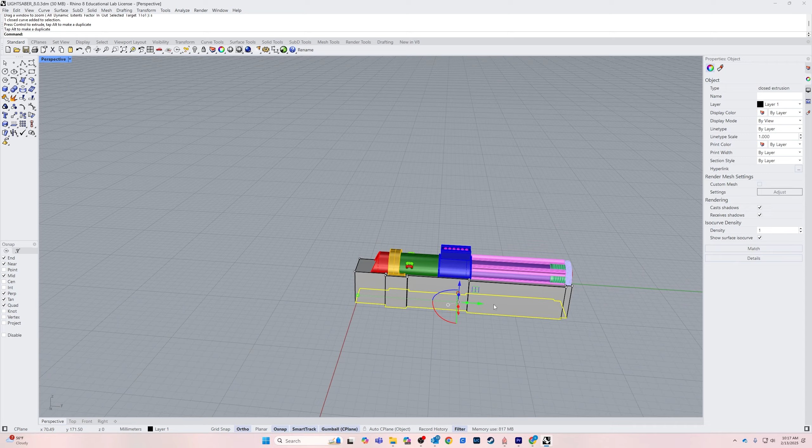All right, so let's go ahead and bring back our box here.

Now for the box, what we want to do is create a bottom for it. So I'm going to isolate the box bottom. And then I'm going to go ahead and go Extrude Surface, select this surface, enter, and just kind of bring it up. So this is actually going to be the foam.

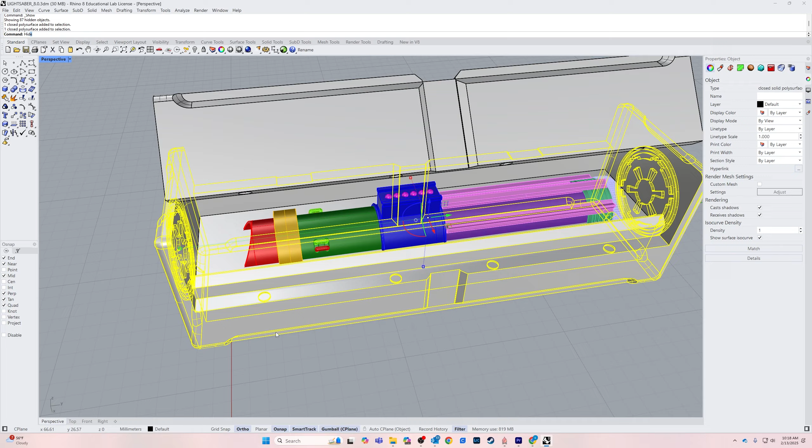The form I just created is going to be the negative space of the foam. All right, so we've got this. We hide this piece. Okay, we've got that. Now what we want to do is move it up.

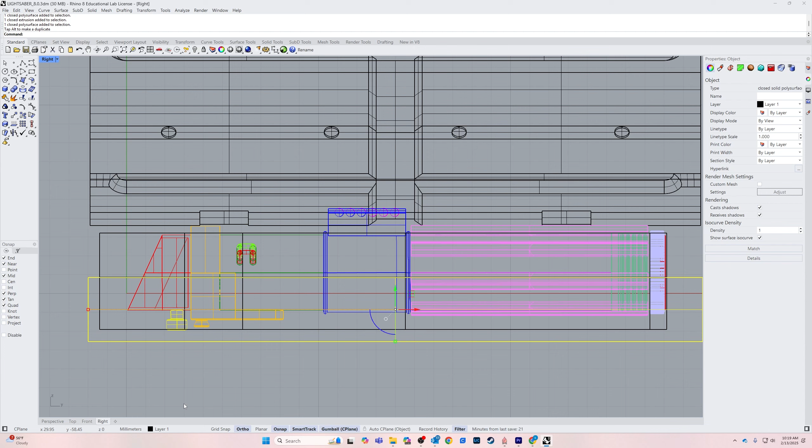Let's switch to a right view here so we can kind of see. This is our foam, and this is the object for our box. We want the foam top to go just below this point here. Okay, and then this is our - all right, so that looks good. Switching back to perspective here.

So now what you can see is we've got this shape here, and then we've got this, which is our foam. All we're doing is going Boolean difference - keep this, get rid of this, and now we've got a nice little insert there, and it kind of fits nicely contoured around the object.

I'm going to go ahead and bring this wall in a little bit more. So I'm going to Control Shift or Command Shift click and just kind of pull it towards the object here. Okay.

Very cool. So the last thing we're going to do is add materials to our box. Let's switch back to rendered view. For the box, I'm just going to make it black plastic. So I'll go to materials, add a new one, go to plastic, and change the color to black. Then drag and drop it onto our object here.

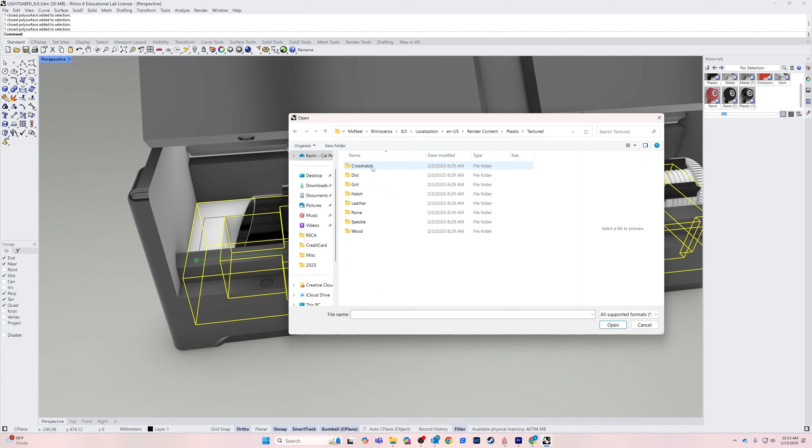And then for this part, I'm going to create a new material and import material from library. I'm looking at a plastic, but I want this leather plastic - black opaque plastic. There we go, leather, black textured opaque plastic, open. And then this is the one I want. Yeah, so it just gives it a little bit of roughness.

We're of course going to change all this stuff later, so it is what it is, but that's basically it. Now we're ready to render this thing out, or I'm going to bring it into Blender and Substance Painter in another video. That should do it for this one. See you on the next one.